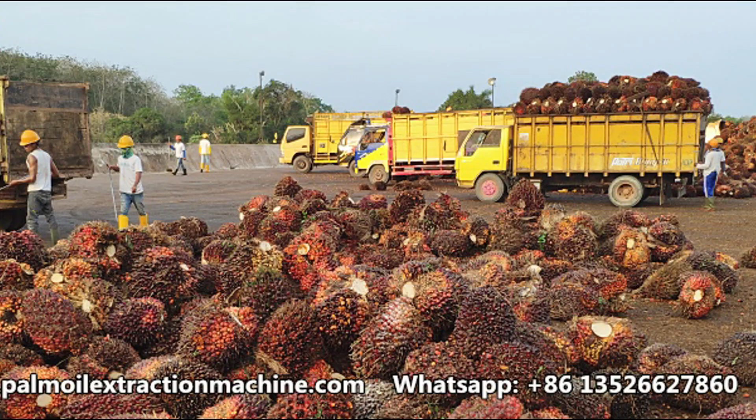In Africa or Southeast Asia, investing in palm oil production projects is very attractive for many bosses, but the thought of slow project progress and long installation period is a headache. Today, let's look at a compact palm oil pressing production line that requires no installation, allowing you to skip lengthy preparations and start production quickly.

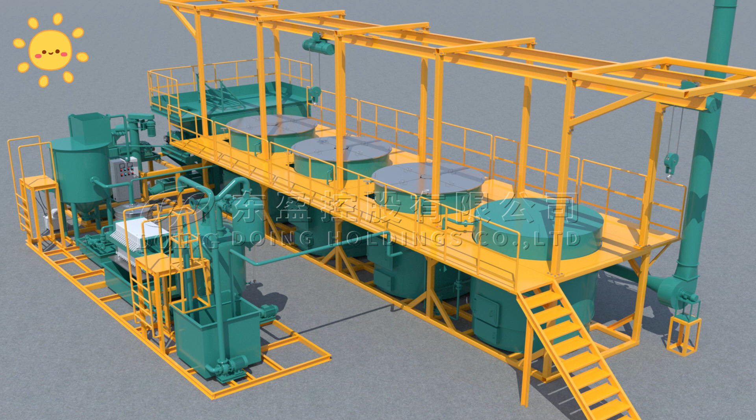First, let's look at the overall structure of this small-scale production line. It consists of 3 frames, each only the size of a shipping container for easy transportation.

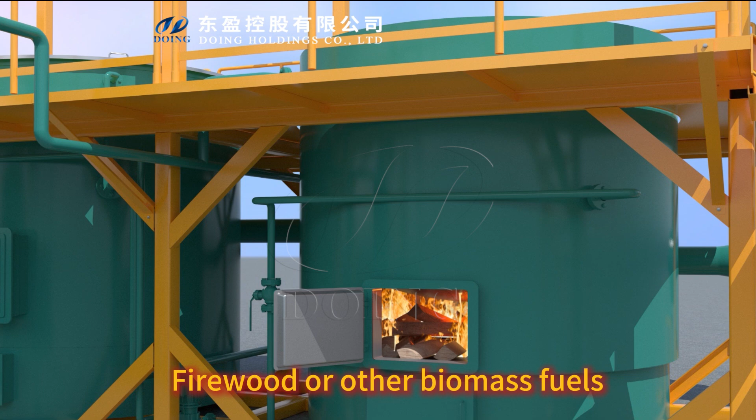The first frame is composed of a hot water tank and 3 sterilization tanks. The hot water tank can supply hot water and steam for the entire production. Its design, along with that of the sterilization tanks, allows direct burning of firewood or other biomass fuels underneath, eliminating the need for a steam boiler and reducing costs.

The upper frame is equipped with an electric hoist to facilitate workers in installing hanging fruit cages. Workers place fruit clusters into the cages, which are then lifted into the sterilization tank for treatment.

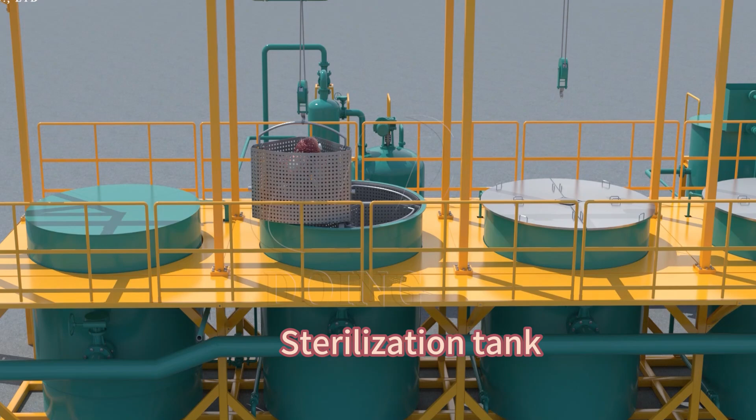The second frame consists of a thresher and 2 oil presses. After sterilization, the fruit bunches will be lifted by workers again and put into the feeding port of the fruit thresher, which is a rotary drum design. During the rotation process, the fruit will loosen and fall into the conveyor below.

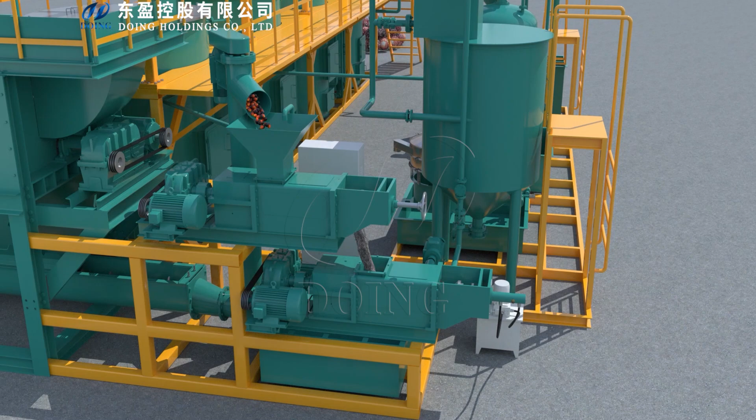The empty fruit bunches will go out from the other end of the rotary drum, which can be collected by workers and burned. The fruit first enters the first oil press for preliminary crushing, and then enters the second oil press for pressing. The third frame consists of a sand settling tank, a rotary vibrating screen, a plate and frame filter, and a vacuum dehydration system.

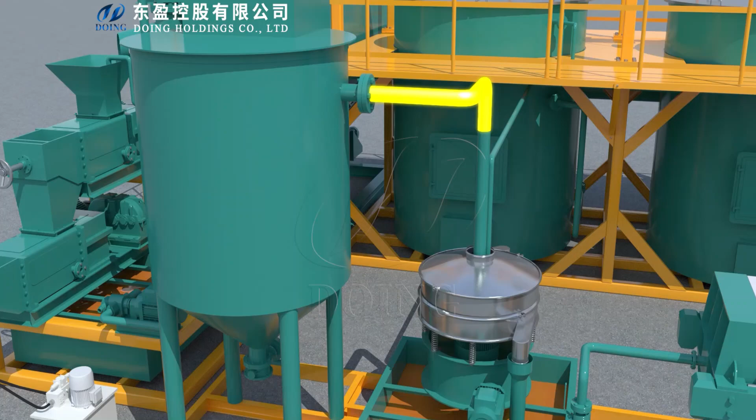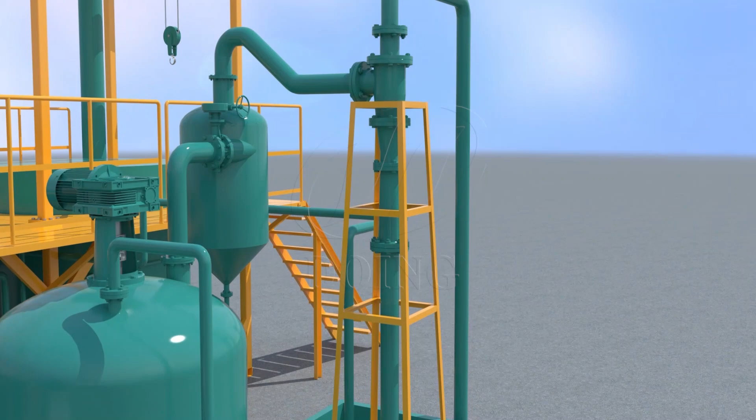The palm oil squeezed out by the oil press contains heavy impurities, such as mud, sand, and pulp fibers. The sand settling tank removes the heavy impurities through sedimentation. The fine screen of the rotary vibrating screen filters out the suspended fibers, and the plate and frame filter performs fine filtration to obtain pure palm oil.

However, the water content of the crude oil will affect the shelf life. The vacuum dehydration system will heat the crude oil in a vacuum state to evaporate the water to achieve the dehydration effect, and the dehydrated crude oil can be stored.

If you need oil tanks, you need to design the matching products. The oil tanks need to be welded on site. Once your equipment arrives, you can put the production line into operation after simple pipe and power connection.

That's all for today. Next time, we will introduce the palm pressing production line and see what the 1 to 2 tons per hour automated production line has.